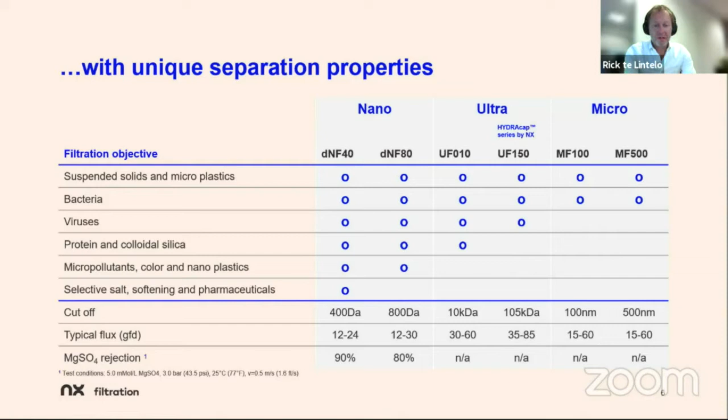All of this is very innovative, and innovation is running through our veins, and of course you cannot be innovative without having everything patented. So a lot of our production steps are patented. The layer by layer technology is patented to protect the uniqueness of this product. Next slide.

As Allan mentioned already, I'm based here in Enschede in the eastern part of the Netherlands, and everything we do is produced and developed here in the Netherlands. We have at the moment 2 offices, 2 production locations, and in the near future we will move to our state-of-the-art new factory, and we do the whole membrane spinning and coating here in Enschede. Of course, you need to control the process, quality, etc. And we produce the modules here in the Netherlands as well.

So all is made in Holland, and that makes us very flexible. And that creates a lot of innovation power, also in combination with the university here. And it's easy to scale up our production as we become more successful. Next slide.

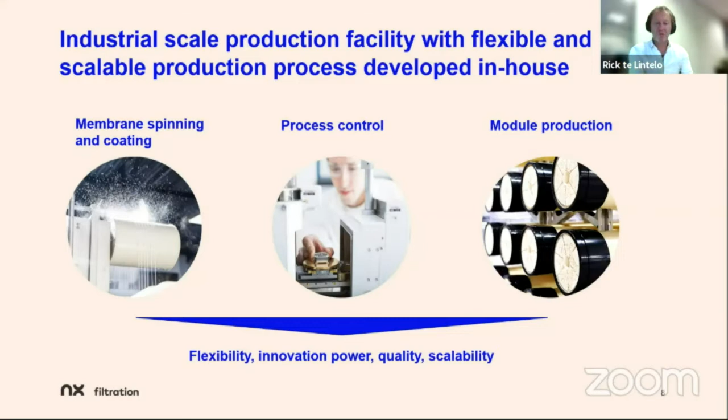You cannot do all of this without being ISO certified, which we are, and also having a number of drinking water certifications in our portfolio, like NSF and the Dutch and German drinking water approvals. And we are working on more drinking water approvals, like the French and the English DWI, and more to come after that as well. Next slide.

Sustainability is very important nowadays, and when we went to the stock exchange, we were also listed by Cicero with a dark green label, and that is a very important label for us to be assigned. We are the first one to receive this dark green label, and that is partly because we want to support our customers in the whole chain, in reuse, creating clean drinking water, supporting the industry with reusing wastewater, and contributing to a better world.

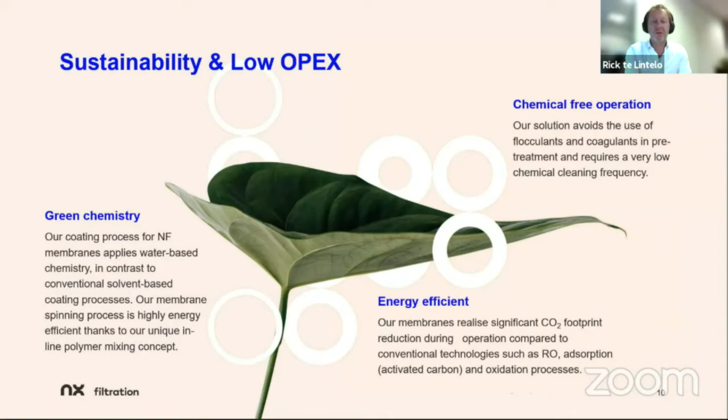Our membranes operate at very low pressures and very low energy consumption compared to other technologies available in the market. So on the one hand, we try to be very sustainable in our own production process, and on the other side, from an operational point of view, we are trying to support our customers in being very sustainable, and that creates very low OPEX. Next slide.

So this was my introduction to NX Filtration, and I would like to give the word now to Allan to make a more deep dive into our products and the applications where we are already successful today.

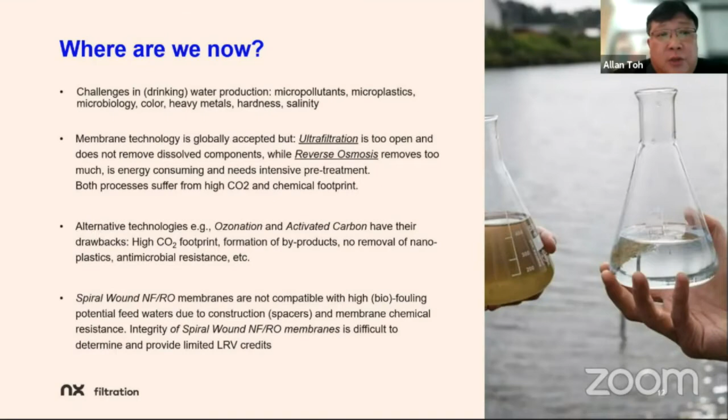In the past, the market is aware that NF and RO are spiral wound. But if you listen to what Rick has mentioned, our uniqueness is that our nanofiltration technology is hollow fiber. I repeat again, it is interesting because we are absolutely different from the previous technologies, which use spiral wound. Rick has mentioned we have quite a range of technologies, and we'll be spending a bit more time talking about this. I won't talk about the UF, I won't talk about the MF. I'm sure that you guys in Malaysia have used it plentifully already.

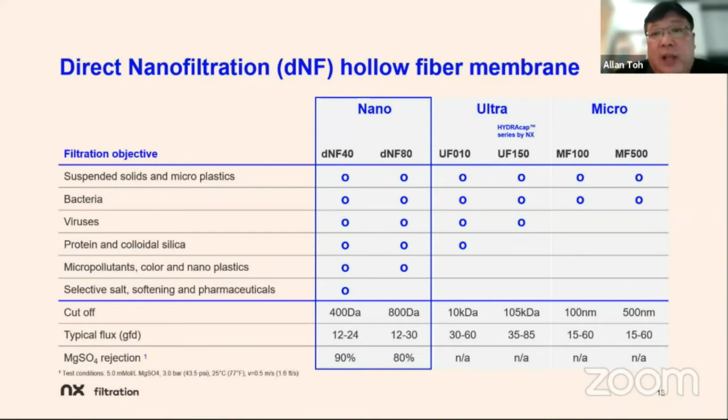Traditionally, as I mentioned earlier on, membranes, especially for nanofiltration and reverse osmosis, are based on spiral wound. That means they are wrapped up with spacers, and then they have a collector tube and so on. Now, basically, I've added in a small simplified flow diagram. You have feed tanks, you have pre-filtration. Then the water goes into the buffer tank, and you have a pump to pull the flow through.

So basically for the UF, you probably run at 1.5 to 2 bar pressure, and at the NF and the RO, you're running above 6 to 7 bar pressure. But generally, we are running in most cases between 3 to 4 bars. That's where Rick mentioned earlier, we are really, really low in energy and carbon footprint. So compare the two designs, you can see very quickly: hollow fiber.

Our hollow fiber, just a little bit more information: we are inside-out flow membranes. So you can see from the flow diagram, it is a lot simplified. And as Rick has mentioned, just with a simplified pre-filter, voila, you have clean filtered water. A bit more deep diving into our membranes. Take a look at this.

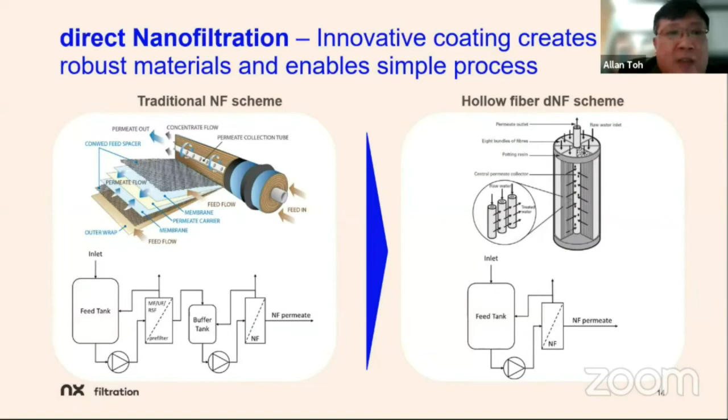We are one of the thickest hollow fiber membranes in the world. And what's important, you can see our inside-out design, the graded density of how our fibers are actually created. It is very dense on the inside, then you have the special nano coatings, and then the graded density where the water comes out from the inside out. For those of you who are asking what material we are using: we are using charged support PES, polyethersulfone.

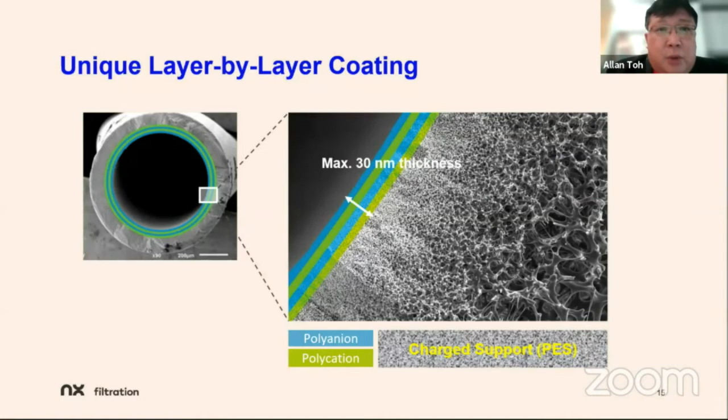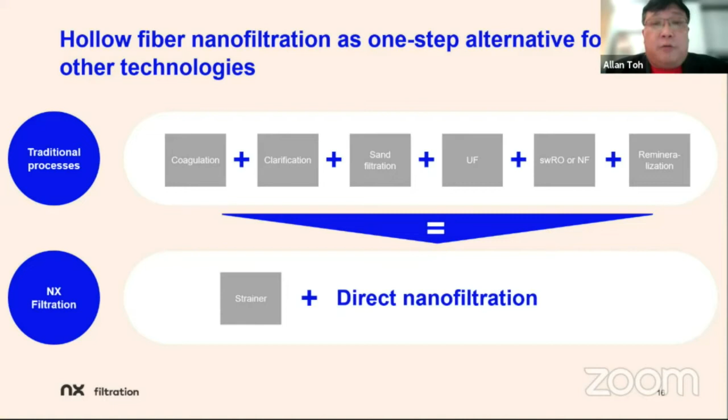Isn't it? I hope that this is wonderful for you, because this is going to reduce a lot of capex. It is going to reduce a lot of land space, which in many cases in Malaysia, as the country expands, the water need expands, the water treatment plant is actually fixed in size. So with direct nanofiltration, you have a possibility of reducing the footprint and yet increasing the water flow.

Okay. Going a little bit further, this slide is prepared for you, for Malaysia actually. Obviously, you have drinking water for removing the hardness and the TOC levels in the water. In industries, I've put down some industries over here, but one industry that I've not added here is the semiconductor, which we are very pleased to share with all our Malaysian friends that we are already starting to look into, especially semiconductors in Penang.

As you know, in Penang there's a lot of semiconductor manufacturing opportunities, and a lot of these are using a lot of UF and RO. So with our one-step technology, we are actually able to bring down capex costs and increase the reliability of our solution for people.

In Malaysia, there's a lot of talk with Indah Water and so on about recycling of the wastewater. Lots of things are going on over there. I will not delve too much into it, because I believe this week you have heard a lot from other presenters and likewise from Indah Water as well.

Great opportunities abound in the wastewater discharge, and I'll just use Top Glove as an example. They have been one of the success stories in Malaysia. They manufacture rubber gloves and so on. But did you know in the wastewater process, there are a lot of micropollutants from the rubber? Think about it. What if these micropollutants go into our surface water? Well, good news, nanofiltration removes that for you.

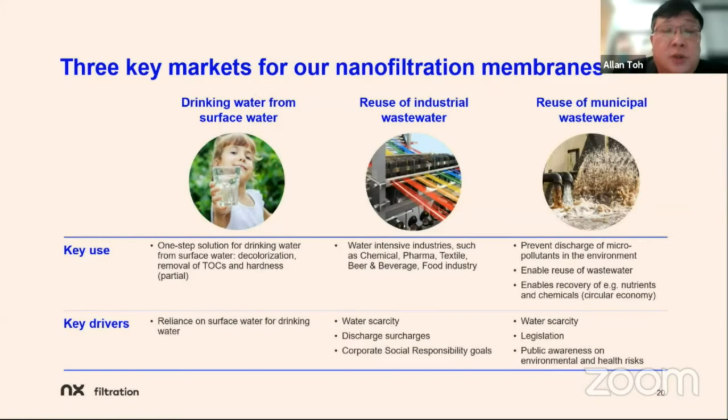Okay, I'm going to go next into case studies. I'm working very hard to find opportunities in Malaysia for all our OEMs and water treatment partners. I have family in Penang, I have family in Johor. I really wish I had actually done something in Malaysia, but in the pandemic situation, many of my case studies in Malaysia are not moving as quickly as I want them to. But nevertheless, I'll be sharing with you some case studies that I've done in Southeast Asia.

Plenty of projects have already taken place. We are in Southeast Asia, in Singapore, and I used to travel a lot before the pandemic, up and down Malaysia. Some of the projects have been done, but I would like you to see that countries where traditionally people say membranes are expensive and so on, countries like Vietnam, Philippines, and Indonesia, which have been notorious for polluted water, are already beginning to use our membrane technology.

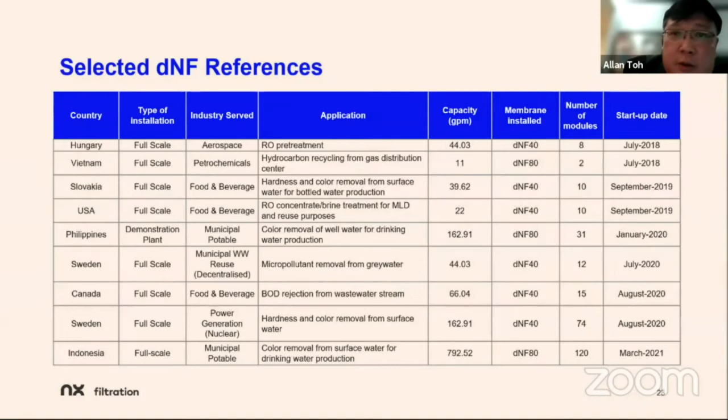To first start, Davao. Well, this is the hometown of the president of the Philippines. The Philippines, as a lot of us know, has a lot of rainfall, especially during the monsoon season and the typhoon seasons. Similar to my moderator in Sarawak, a lot of the water in Davao has a lot of vegetation plantations. For all of you who eat canned fruits, the peaches or even the pineapples, the bananas coming from the Philippines are actually grown in the Mindanao area, where Davao is also part of it.

And the groundwater, unfortunately, with all these plantations, has already been laced with humic acids. Humic acids, for those of you who are aware or not aware, cause the brownish or dark color, like teh or kopi, in our surface waters. And with our nanofiltration membrane, one step, no pre-treatment, and zero anti-scalant as well, we remove 99% of the color, in fact almost 100%, because the color count we have measured is at 0, but since nothing is 100%, we always put down 99%, and a very high recovery of 80%.

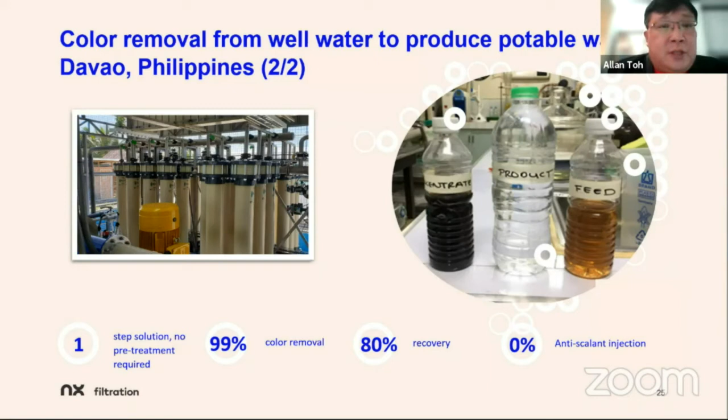A snapshot a little bit more. The color of the feed is on the right-hand side bubble. And you have the product, which is, as I mentioned to you, crystal clear. And you can see the concentrate, which is the waste reject, now looking like coffee. And a snapshot of one of the trains that we have installed on the left-hand side. This one here, I just wanted to show you that we are consistently doing 80 plus recovery, and our quality is at a very, very good level.

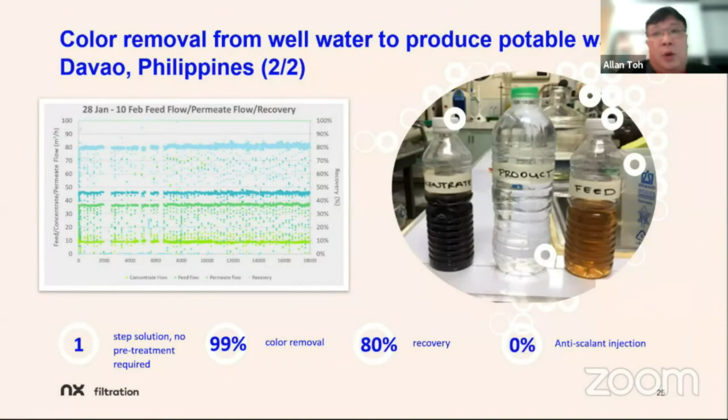A snapshot of what we have done. Remember, Rick has mentioned, we remove the divalents inside the water. So do not expect us to be like a full RO and reduce it to low conductivity or low TDS levels. But you can see the rest of the stuff we are actually removing.

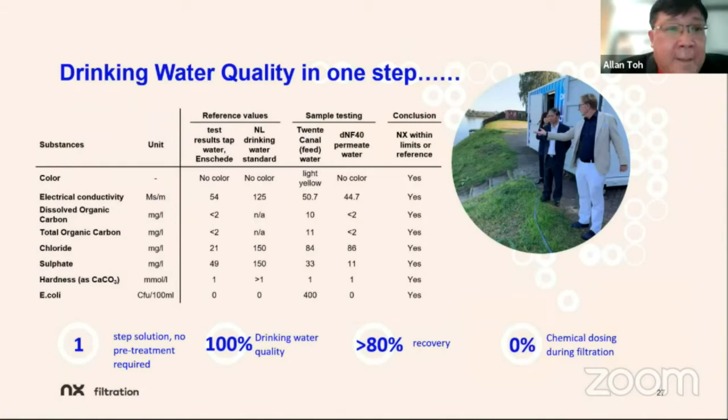Now, this is the biggest plant that we have, that we are currently very proud of. This is in the city of Dumai in Indonesia. For those of you that have been there, a lot of us actually go down to the city of Malacca in Malaysia, and then take a boat over to Dumai. I've done that for several years, as I've done quite a fair bit of projects in this part of Indonesia. This is very unique in Indonesia, because Dumai is the so-called mecca of the palm oil industry. I know Indonesia and Malaysia are always fighting on palm oil, who's number one, but this is one of the largest palm oil refinery areas in Indonesia.

And the uniqueness is that so much of the water has been taken into the refineries for boiler feed and so on. The citizens of Dumai don't have water. They actually have to truck water almost 3 to 4 hours away from another city. But it's not because they don't have water. They have a main river, the Masjid River, but it has the same problem as Davao. It's very badly colored by the rotting vegetation from the palm oil and so on. I think this is quite similar to what we have in Sarawak as well, where the humic acid causes the color to be very bad.

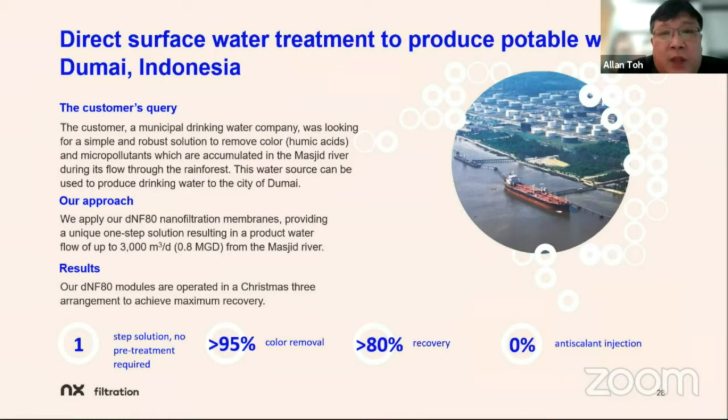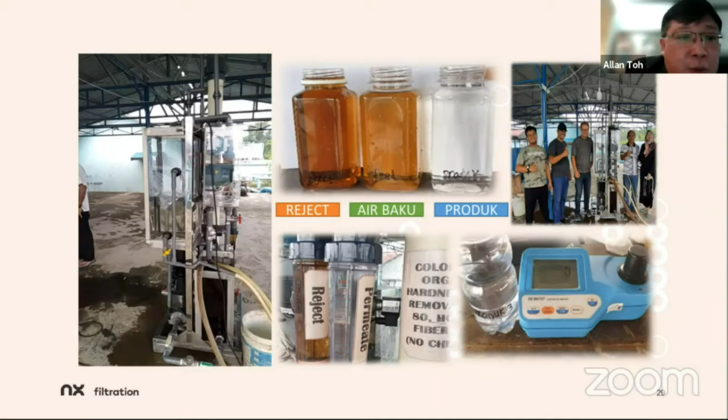This is a snapshot of the plant. From the pilot, we have moved on to a large plant, and this is now one of the largest membrane filtration plants in Indonesia at this moment, using direct nanofiltration.

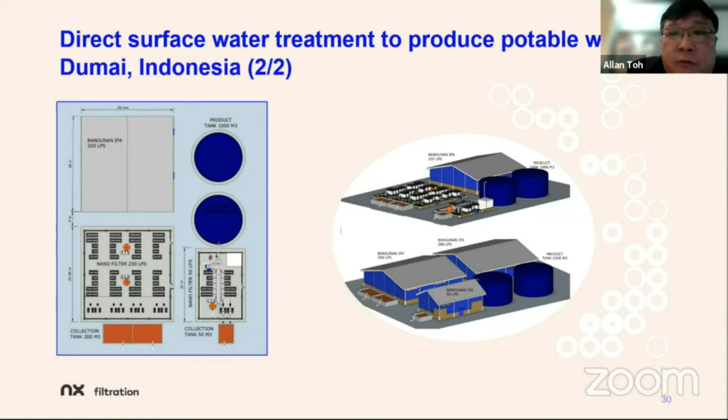Now, enough of drinking water. Maybe people are looking at the new things and say, oh, Allan, you shouldn't be talking so much about surface water. But okay, what about wastewater? Let's do this. On wastewater in Europe, the conventional wastewater treatment plants, and it's likewise in Southeast Asia as well, we use a lot of clarifiers. We use the normal technology to treat our wastewater.

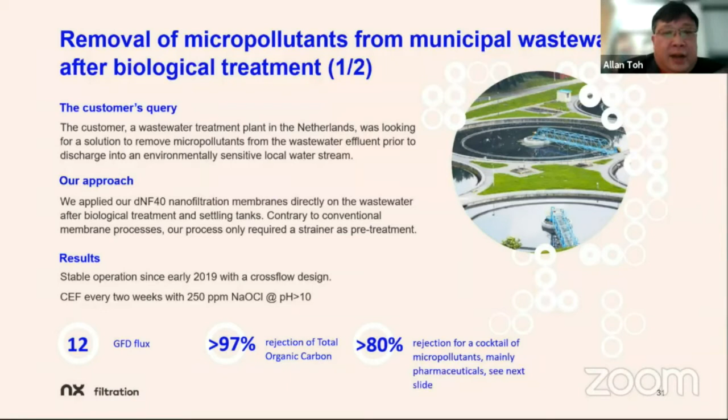But what if this wastewater can be recycled? And this is exactly what we have done in this opportunity here in the Netherlands. What's different from the technologies that we have shared is that the UF does not remove the micropollutants. The RO does remove them, but not everything. But surprisingly, nanofiltration actually removes a tremendous amount of these micropollutants that are dissolved inside the water.

Okay. Moving a little bit faster because we are running out of time. In a wastewater treatment, you see the nitrification process and so on. But what we have done is that we have short-circuited it. These costs are taken from European pricing. It all really depends on the cost of labor, the cost of energy, the cost of chemicals, and so on.

But in Europe, to treat the wastewater is about 0.5 to 0.6 euros. I know that these numbers are not aligned to what we have in Southeast Asia, but you can generally know that it's going to be a lot cheaper if you do it in Malaysia or in Southeast Asia.

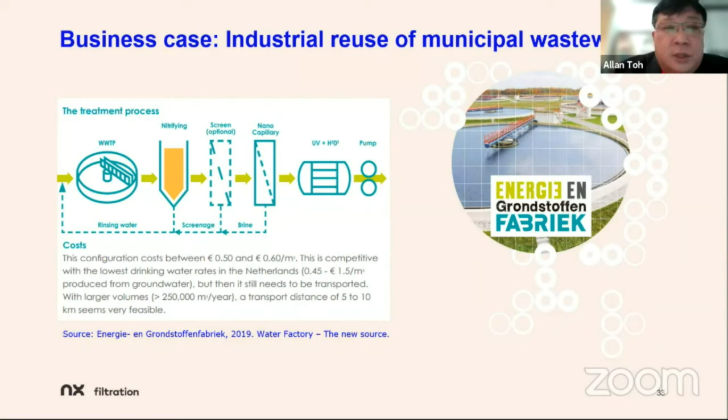Moving a little bit more, comparing ourselves with similar technology without mentioning brands, you can see that in our hollow fiber nanofiltration, we are removing a significantly higher amount of micropollutants. In this case, we're talking about organic micropollutants.

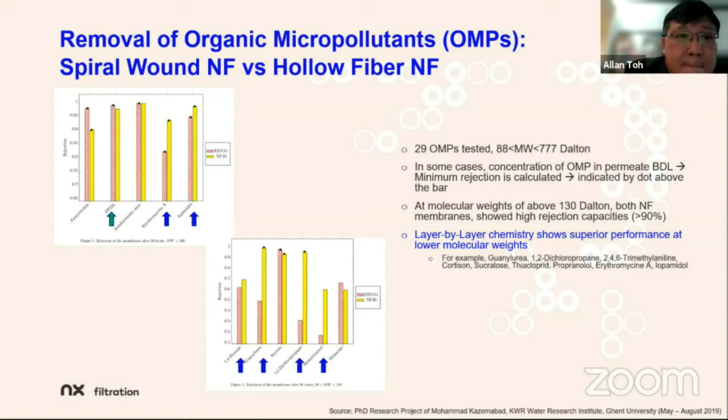In Malaysia, of course, we will not forget our friends in aerospace. The moment we talk about aerospace or aeroplanes, we talk about AirAsia. In a lot of the aerospace industries where planes are actually manufactured, in this case American aerospace, without mentioning brands, you should know which brand I'm talking about. They use a lot of clean water to clean the aeroplane parts and so on.

Why RO water? For those of you who are not aware, they use RO water because they want it without static. Normal water can cause a lot of static in the metal parts, which may spark off in the plane engine, and that's a no-no. So RO water, highly pure treated water, is used to clean many of the parts of the aircraft engines. Again, our membranes are used as a pre-treatment before the second pass RO.

Because we're running out of time, I'm going to move a little bit faster. In Penang, for example, we are talking to a semiconductor industry. The normal plants are using softeners, they use carbon to remove the chlorine and so on, then followed by the UF and a double pass RO.

With our DNF technology, we are able to shortcut it down to just raw water from PBA Penang, which goes through a coarse filter of 150 microns and straight to our DNF membranes, followed by one pass RO. Of course, there's polishing using mixed bed resins and so on.

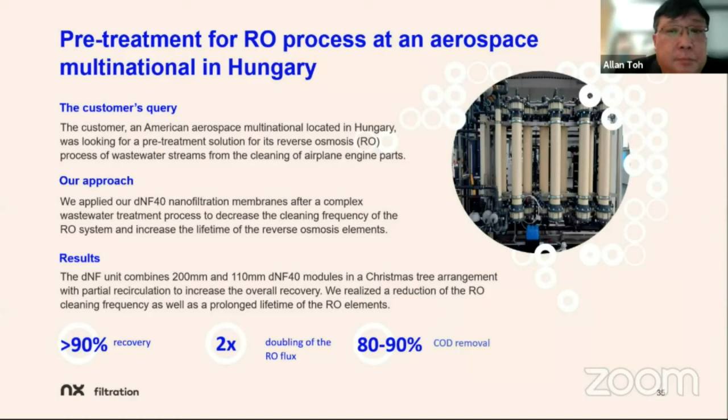Moving a bit quicker, this is a plant in Canada, in which a soft drink manufacturer, starting with brand P, is using our membranes to recycle the wastewater and to recover the sugar syrup.

And the reason I brought this up here is because in Malaysia, there are also a lot of food industries with sugar, for example the sugar discharge, the sugar waters, the sugar color. For those of you who are aware, in the sugar industry, if you use chemicals to bleach the sugar to make it white, then you may not be able to sell it into the European or American markets.

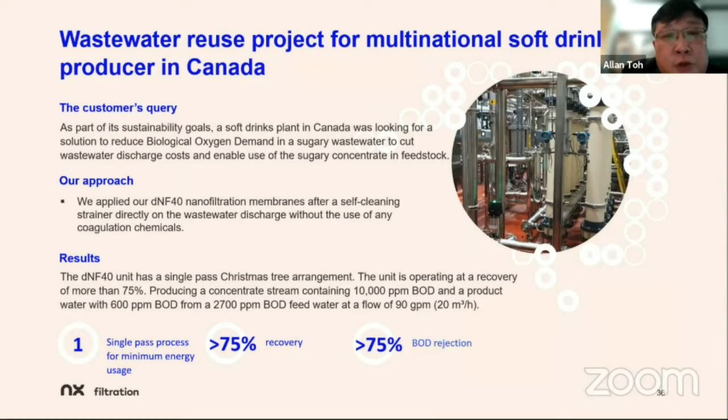But if you use membrane technology as a sustainable nature of creating sugar, then you're able to sell it off to the European markets as well. Okay, a lot more, yeah. Fishery, tanneries, food discharge, and so on and so forth. This is something that we have been doing a lot as well, and I'm looking for opportunities here in Malaysia for this time being. Okay.

So yes, as we mentioned, our technology is new. So in order to show that our membranes are actually working, we have produced different pilots to loan to our friends who are interested. In this case, this is the lab scale, where we are able to produce up to 2 liters per minute for you to bring it to a laboratory to get it tested, to show that the water quality is okay.

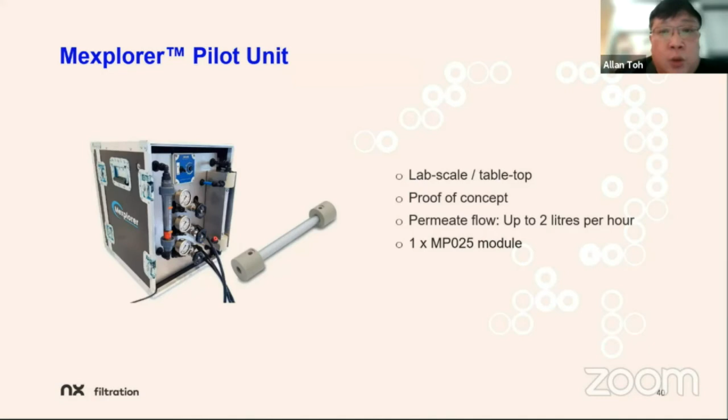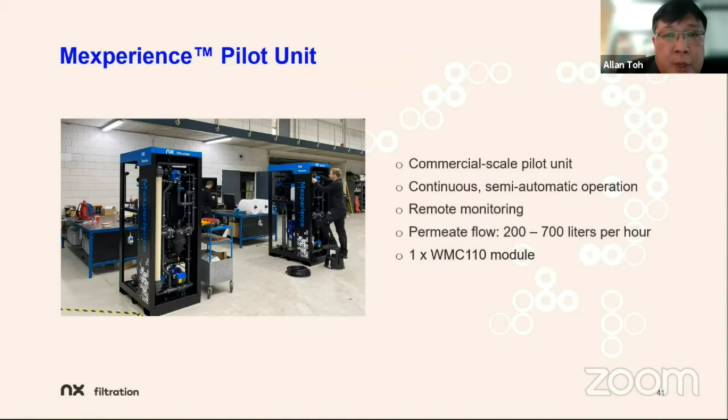For those of you who need a medium size, of course, we have a larger one, which is a mid-size one. We call it the Mexperience. And this produces up to 700 liters of water in what we call a 4-inch module. And for those who want a larger pilot, we have it in a full scale. This is our full commercial scale model, which is a full 8-inch module, in which we are producing up to 2,000 liters.